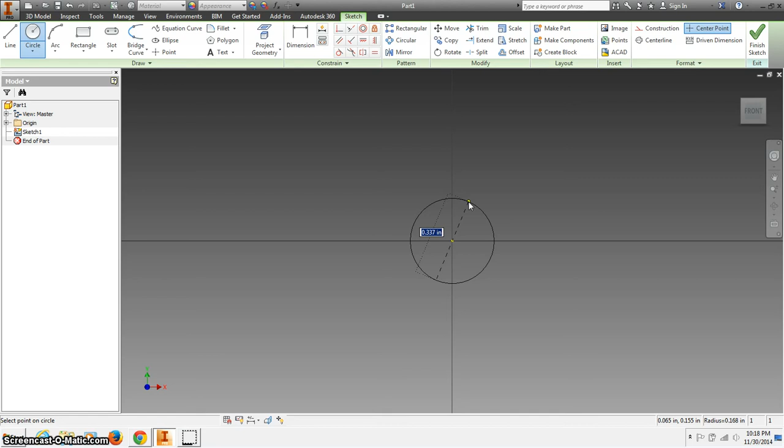So it's going to start as, looks like 0.34. Oh, we'll go ½ inch, 0.5 diameter. Let's finish that. Extrude this out. You'll have something that's about 2½ inches long.

Okay. Then on either side, we're going to tap into it. So let's make a new sketch on that face. And we can finish it immediately because it puts a little dot in for us when we make a sketch on a circle. On that dot, we're going to make a tapped hole.

It's something that we haven't talked a whole lot about yet, is different hole types and how to read them. This little thing down here, the first number it gives you is the diameter. The second number it gives you is how many threads there are per inch. And then the letter designation afterward lets you know if it's coarse or fine or extra fine threads. So UNC is Unified National Coarse Threads.

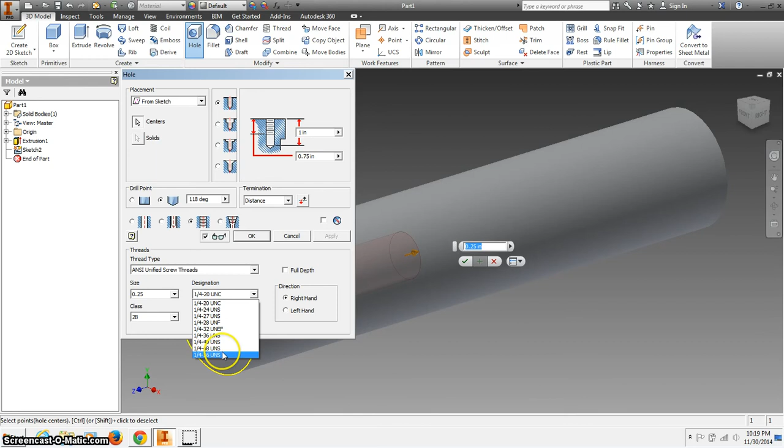These would be super fine, fine, extra fine. And it's just different derivations of that. And notice the diameter is the same in all of these, and the threads per inch is different in each one. Alright, what we're actually looking for is not going to be a 1/4 inch. Change the diameter, the size here. We want this to actually be 10-32.

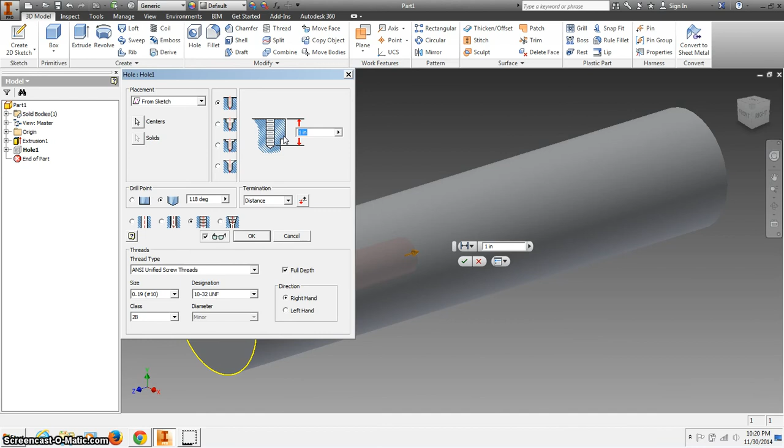Click OK. Oh, you know what? We didn't give it a depth for that hole. So double click on hole. It's actually not 1 inch deep. According to my drawing, this is actually supposed to be a depth of 0.75. And I believe that will be on both sides.

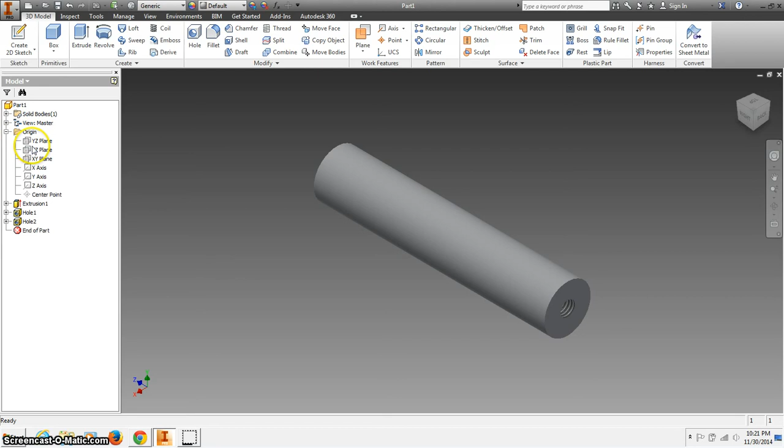So let's make a new sketch over here and finish it. Click on the dot, hole. This is going to be tapped again. It's 0.75 and it's 10-32 again. Perfect. Now let's go into our origin folder. We're going to start to make a revolve on here. Let's go new sketch.

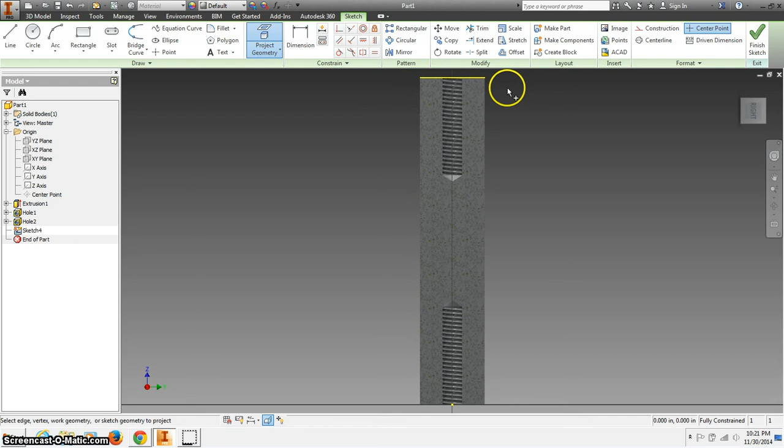Let's slice graphics. Oops, not create feature. Slice graphics. Okay, so there we can see our 2 taps. That looks good. But now we're also going to go ahead and change a few other things. We're going to remove a chunk of this. It's probably going to be best to project geometry first. So I have a line up here. I want this angle to be 80 degrees.

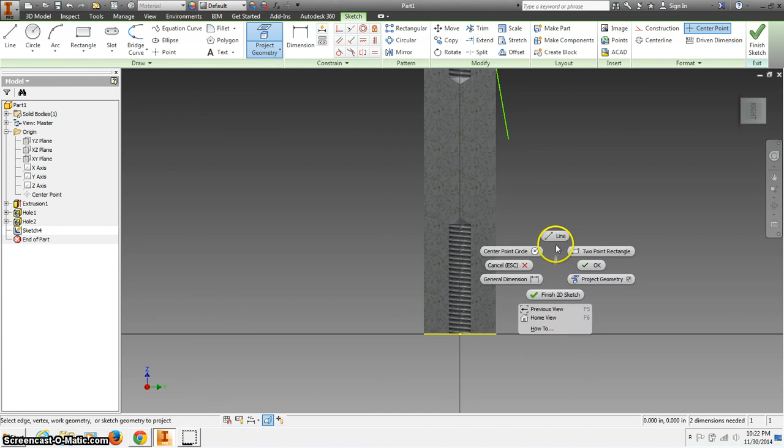Okay, and I'm going to have the exact same thing on this side. So let's project the geometry of this bottom face here. Let's make another line. Let's not try and snap that to anything. Let's also have this be at 80 degrees. Okay, and let's go back to projecting geometry again.

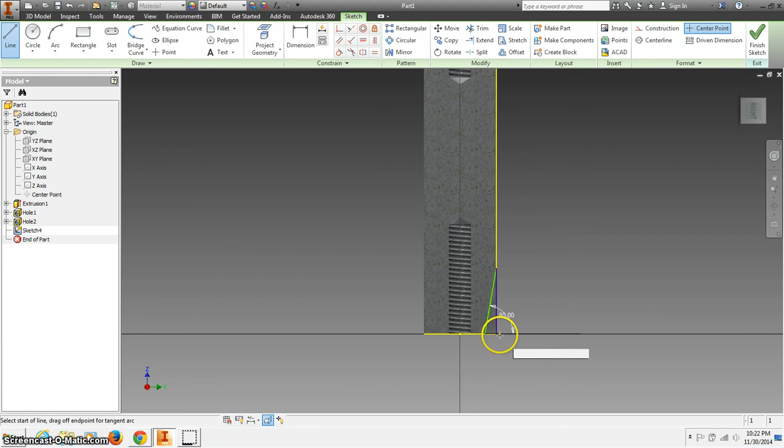We're going to show this outside edge. We're going to trim off the parts we don't need there and there. And I'm going to draw in with lines to make this look like a triangle. This is all well and good, but I don't know, or you wouldn't know just from looking at this.

I don't know if I got that right. You wouldn't know how far over to make this. You know it's supposed to be 10 degrees, this angle inside here is 10 degrees, but you don't know how far over this should be. The drawing says that it is 0.23 diameter, which means that from this center point here to here should be half of that.

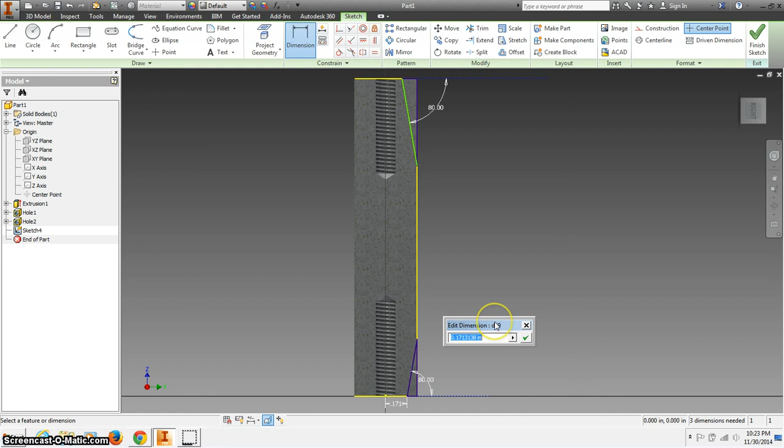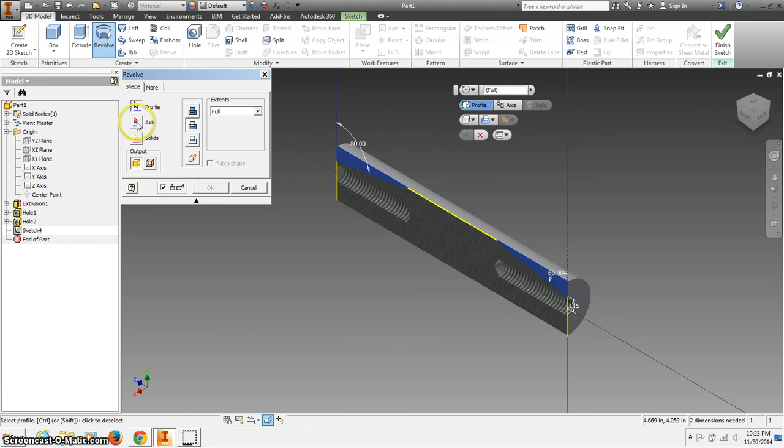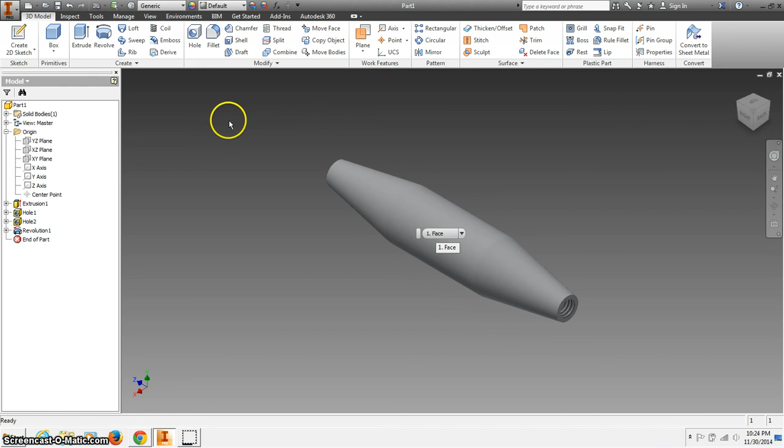Let's check that off. That looks good. Now to make this look a little nicer on the inside part here, actually, yeah, I like that. That seems okay. Let's go back to one of these planes here that cuts through the middle, and make a new sketch again. Slice graphics. I'm going to project the geometry of one of these sides, and it looks like we're just going to notch into this.

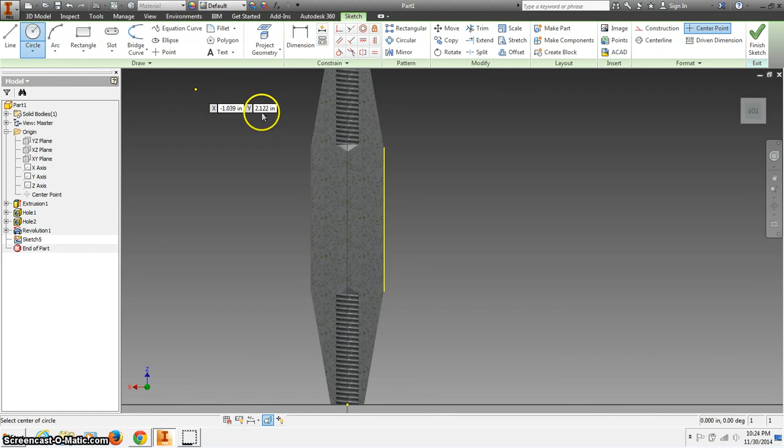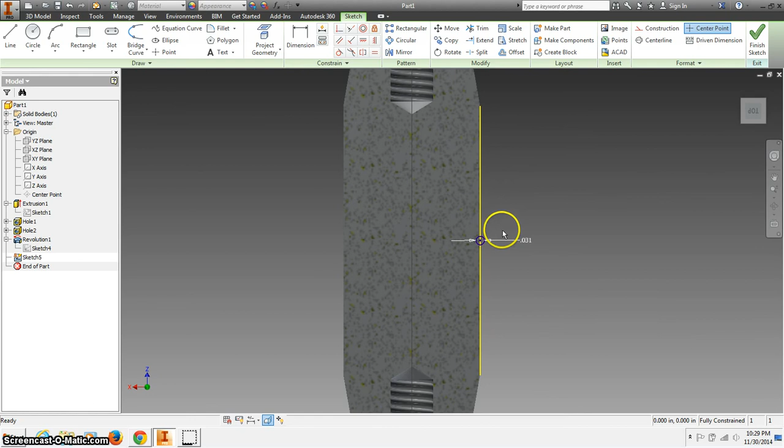So if we use our circle tool, we are going to cut in. We're going to end up making 5 cuts in here, and we're going to make them 1/32, so 0.03125 with the diameter of your circle there. Okay, let's go and make one over here. Actually, it seems a little too low. Tell you what, let's just go ahead and revolve cut this one. Let's see what that would look like.

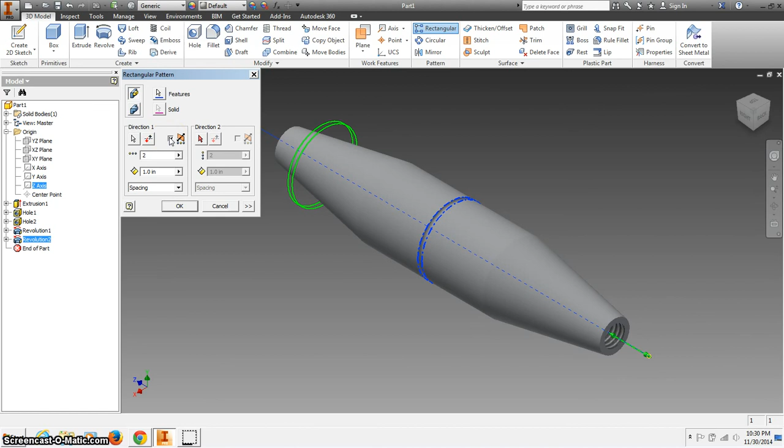So here's revolve. We have just a circle, so make sure we select that as our feature. We are removing material. For your axis, you're selecting the Z-axis again. Click OK. And now we can actually use the rectangular pattern tool, using that as our feature. For the direction, I think we can pick the Z-axis. Perfect. We're going to have it go in both directions, so out of the midplane. And we need 5 altogether.

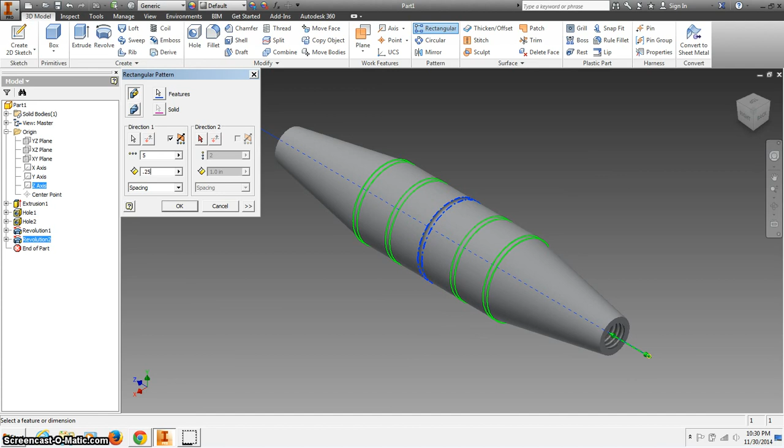Okay, now let's figure out spacing. How about 1/8 inch spacing? What does that look like? That's looking pretty good to me. What if we did, instead of 1/8 inch spacing, 1/4 inch spacing? I think 1/4 inch is actually going to look better. So spaced out 1/4 inch. And let's see here. That might be about it, all the way up until the drawing part.

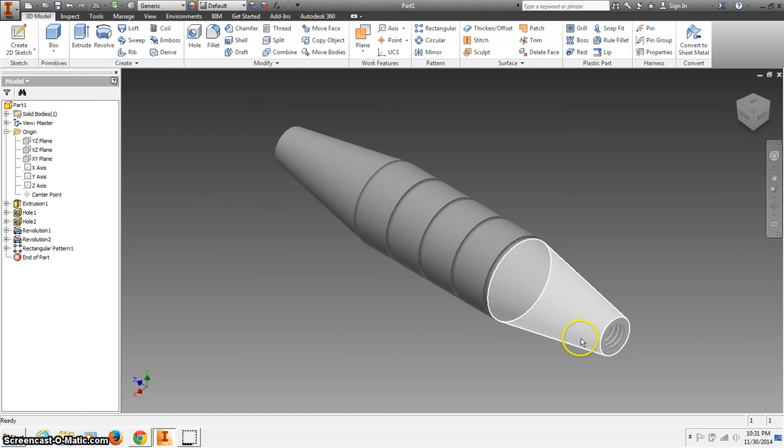So again, this is not something that should take you very long. This is just a single part file. Now when you're actually making these, you're going to have to make 3 of them to be the exact same and have the exact same placement of the notches, angles, everything else. And it has to be tapped. That's just using a tap, you don't have to do that manually. But you're actually going to thread in both the fletching and the dart tip, so you can actually use these. It's a usable object.

Alright, this is aluminum. So let's change the material type up here to polished aluminum. And save this. You may have to make a new folder for it. And we're going to make this into the Dart project.

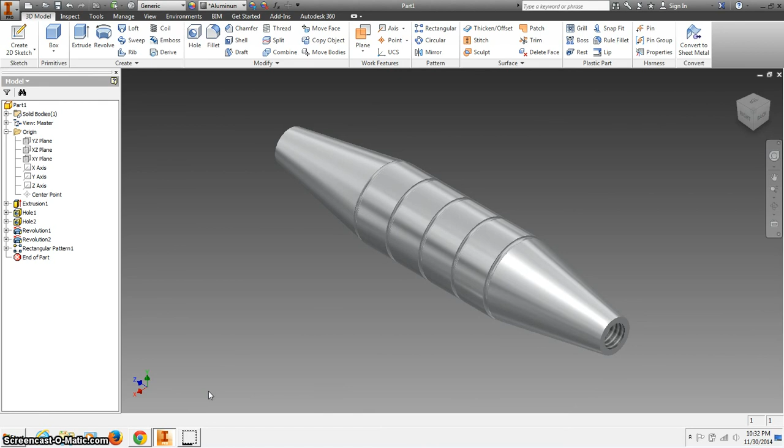So next video we're going to go over how to make drawing files for this, which is a little bit more complicated. We're going to get into how to make section views, how to make detail views, and why we would do some of that stuff. So we're going to hold off on that, and we'll pick up on